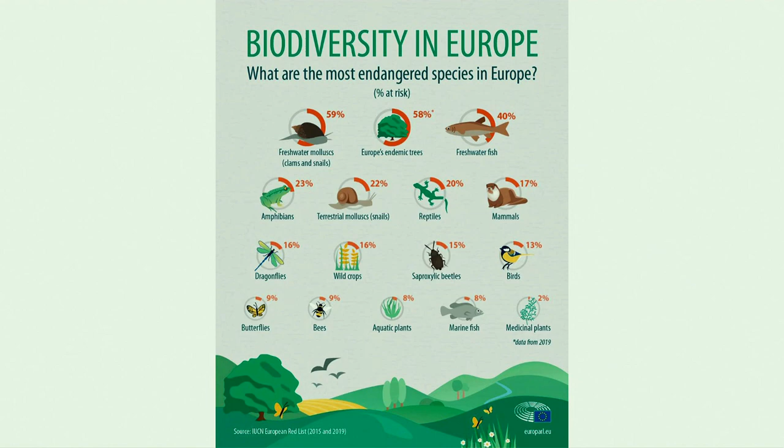Right, so barriers in fish. Freshwater fish are in trouble. That's the short version now after yesterday. I think we all agree on that. And of course, the freshwater mussels, Martin. Why is that? Well, obviously, climate change, overfishing, and also the presence of dams. And I think this slide, or some version of it, has been mandatory in most talks. So I think we can all agree on that.

Europe is heavily fragmented. But the thing is that obviously not all these barriers have anything to do with hydropower. So most of the other barriers are obsolete, and we can remove them if we have the funding and if we have a good plan for in what order to remove them. But the dams connected to hydropower is a different story. But why do they matter?

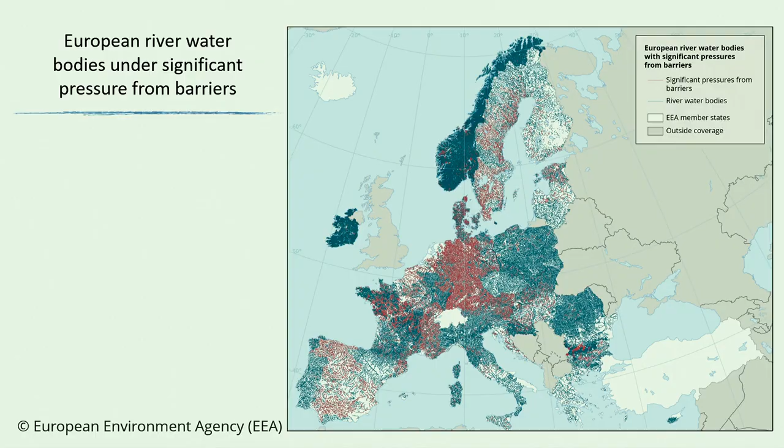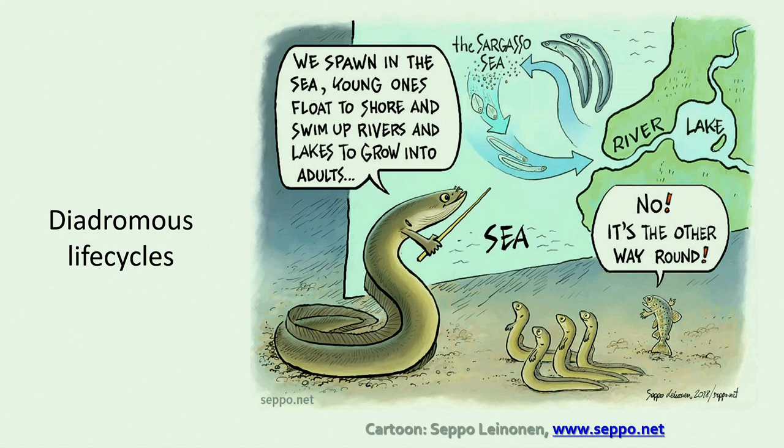Well, we saw the theater play yesterday that really dug into the details here. I'm also, like Jörg, I like the cartoons of Seppo, so here's one of them. So even though the eel and salmon can't really agree on the details, they are both right. I mean, they are both diadromous species, so they rely on intact connectivity between freshwater and saltwater. And I just had to include these wonderful pictures by Jennifer Clausen, showing the two life cycles.

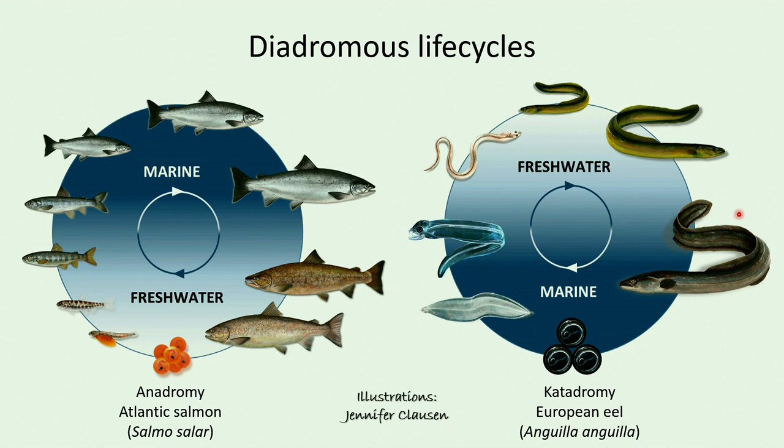So with salmon being anadromous, they spawn in freshwater, stay a couple of years in the river before they move downstream to the ocean for increased growth. And then they head back after a couple of years to the natal stream. We all know this. And then on the other hand, the other extreme, if you like, is the European eel. That is catadromous, so it does the opposite. It spawns at sea, drifts towards Europe. Some, not all, eels enter freshwater for increased growth, and they stay 5 to 30 or even more years in freshwater before they need to go back to sea and cross the Atlantic Ocean again. So it pretty much boils down to same but different for these two species.

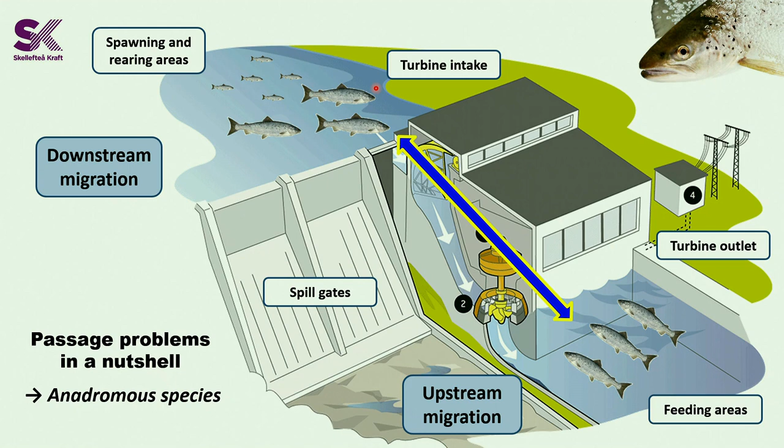So salmon moving upstream as spawners tend to aggregate below the first barrier at the turbine outlet. If they manage to get past somehow, after spawning, they return downstream as kelts, and a couple of years later, their offspring. And they, again, tend to aggregate at the turbines, but the turbine intake this time. So again, same but different for eels.

The major difference here is that they move upstream as juveniles, worm-sized little creatures with a phenomenal climbing capacity. They can climb vertical walls unless they hit the dry spot, and then they fall down and have to start all over again, unless they're already eaten by some predator on the way. And the adult eels, again, 5 to 30 years later, also aggregate at turbine intake, but since they are masters of passing pretty much anything, they tend to move into the turbines and typically get chopped up into 1, 2, 3, or 4 pieces. So again, this is the passage problem in a nutshell. We have to connect downstream with upstream for multiple species.

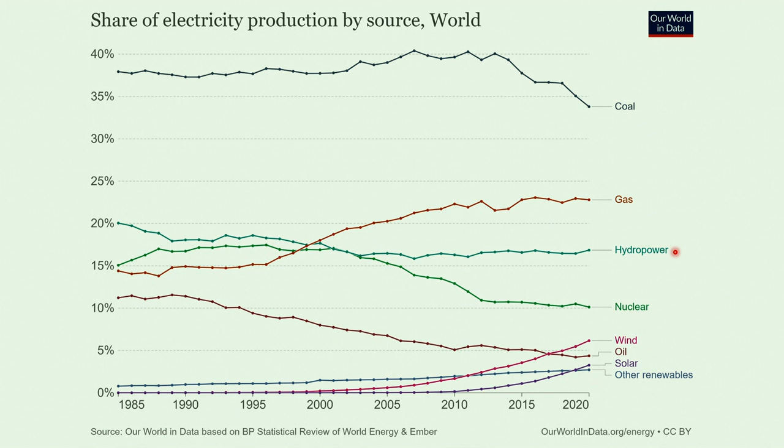Right, but then we do have some use of hydropower. So again, we can't just start removing all the hydropower dams when the electricity production on a global scale looks like this. We need more renewable power. We don't need less. So this is what we saw yesterday in the play with, on the one hand and the other hand, even though I won't be as dramatic when I go through this. But fact is that hydropower is considered to be the main reason behind the declines of more than half of the threatened fish species in Europe.

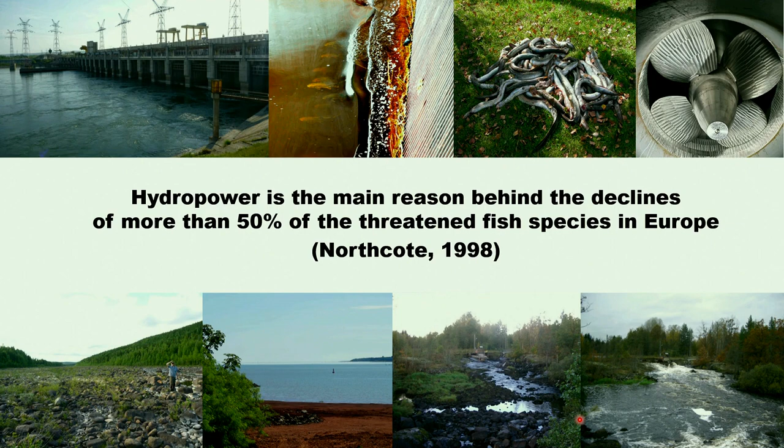And of course, it's not just about fragmentation. We also have turbine passage, fish moving through turbines, getting injured or even killed. We play around a lot with rivers, so we divert water from one river to another, leaving the one river dry, or the opposite when we build dams and create reservoirs, in this case 170 kilometers long at Itaipu, and hydropeaking, with aquatic organisms being faced with these conditions, ranging from more or less dry to flood conditions within a matter of hours, even minutes.

So I would say that we still need our fish passage solutions. And I thought I would just start by showing you the definition of what we call FPS. So it's any device, structure, or mechanism which is designed or operated to facilitate safe movement of fish, of course, in an upstream and/or downstream direction, past one or several impediments. And this is the definition taken from the European standard for assessing FPSs.

So we have kind of agreed on this, at least on a European level. And I think it was Rachel that used the same figure yesterday. So we can divide fishways for upstream passage into technical and nature-like fishways. The technical are typically made out of concrete and wood, and the nature-like are designed to mimic natural conditions. So we're building an artificial creek.

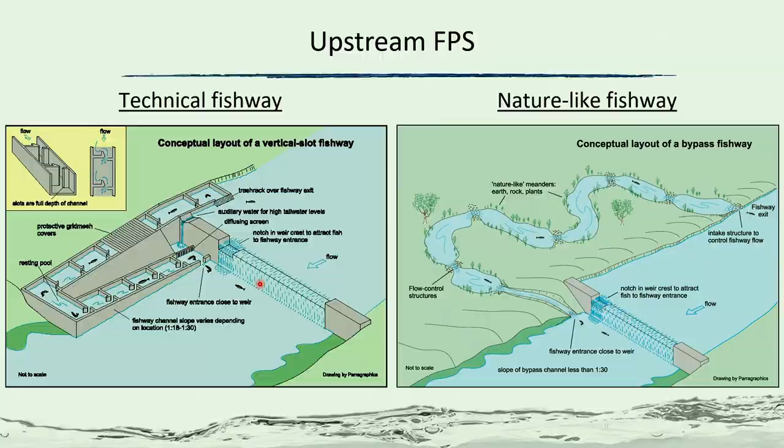And of course, the main idea, the goal with them, they have the same goal, and that's to help fish pass barriers that they cannot overcome. And two examples can be seen here. So obviously the nature-like fishways look prettier, and they require more space, but you can also include habitat in your design, so they can serve more purposes than just simply providing passage.

Downstream passage solutions started to be developed a couple of 100 years later, I guess. And I expect some of you to disagree with me, but I'm simplifying things here. So I would say that this is the main solution at the moment: screens and racks. And we have the two main types, the inclined screen. So that's your powerhouse with the turbines. So the inclined screens guide fish to the surface where you have entrances bypassing the powerhouse. And the angled screens use the same principles, but instead they guide fish sideways to an entrance and bypass the facility.

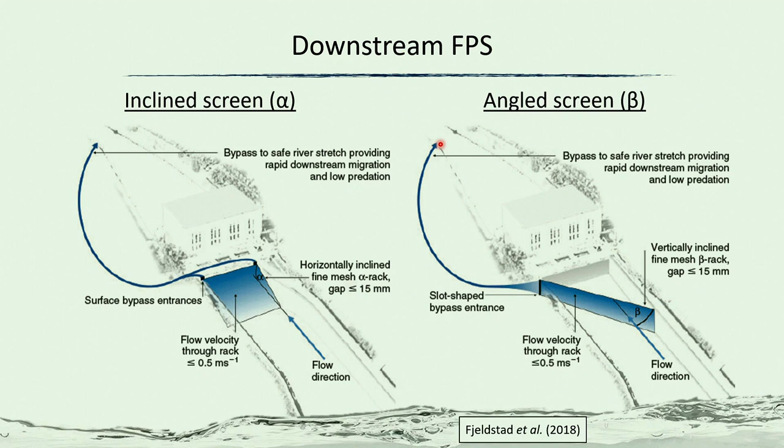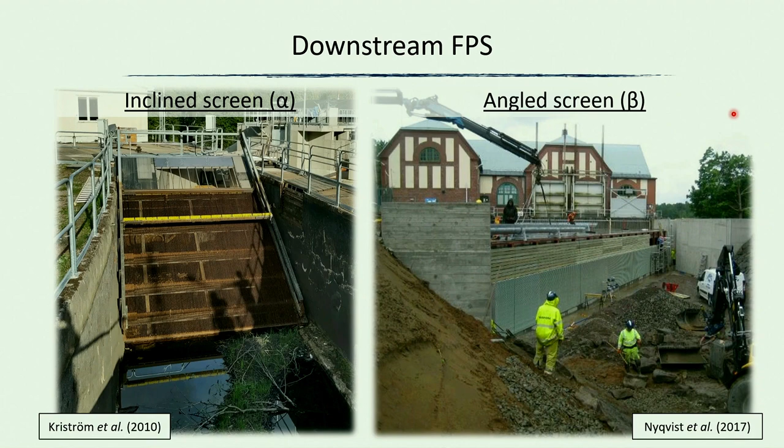And again, two examples. So the inclined rack, this is a relatively, or a very large entrance to bypass. You can see it covers almost the entire width. And the angled screen with entrance over here. And then, of course, we have bubbles and other interesting potential solutions, but I won't talk about them here. But I will mention this quick and dirty option for downstream passage.

It's quite tempting. I mean, all power plants have spill gates. They are there so that you could release water that you cannot store in your reservoir or discharge to the turbines. And again, of course, it's tempting to just open them a bit and say, look what we did for the fish. But in most cases, they don't work. But I will show you one example, one case study in a bit.

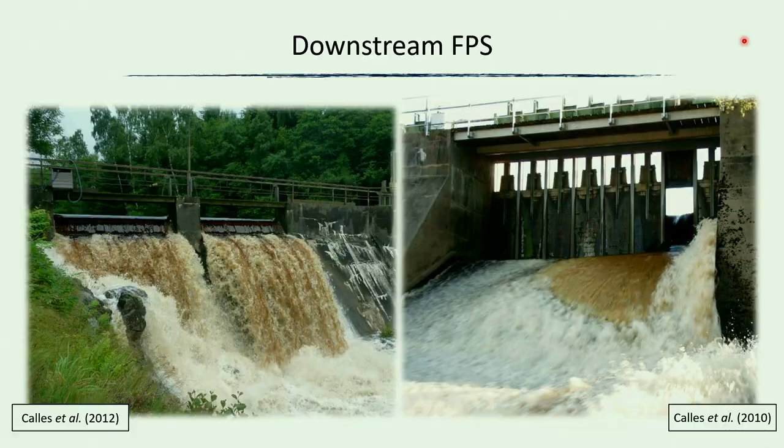So what are we looking for here? What signifies the ultimate fish passage solution? Well, obviously, they should provide two-way passage, because typically you cannot solve both upstream and downstream passage with one solution. Apart from that, they need to be efficient, injury-free, and timely, so limited passage time. Shouldn't take too long for the fish to pass, and they should pass all naturally occurring species and life stages.

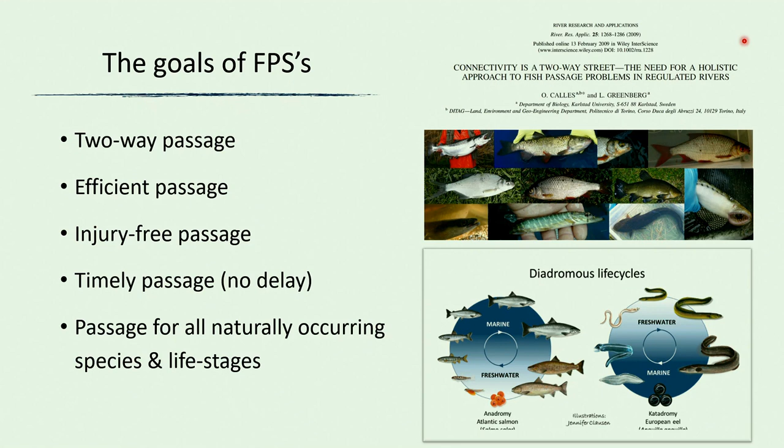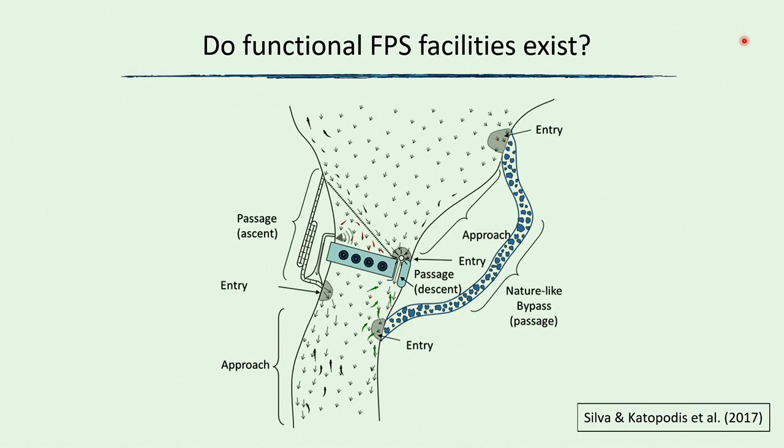I focus on salmon and eels, but that is because they suffered the most from fragmentation, and they're also more easy to study. But do such fully functional fish passage facilities exist? I would say, yeah. This is my favorite example that most of you, I guess, by now have seen before. So this works. It's very close to 100% both upstream and downstream. And I'll provide some details later on.

But like Jörg was saying, obviously from the fish's perspective, the ideal solution is just to get rid of all the dams, all the barriers. But again, we need hydropower, at least for now, so that's not really an option when it comes to hydropower dams.

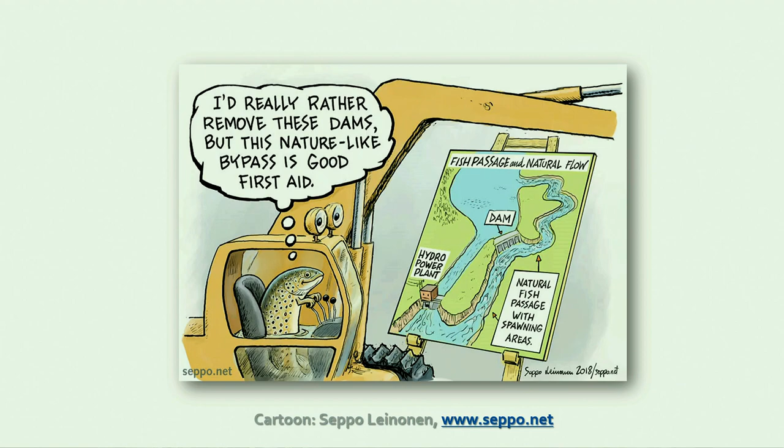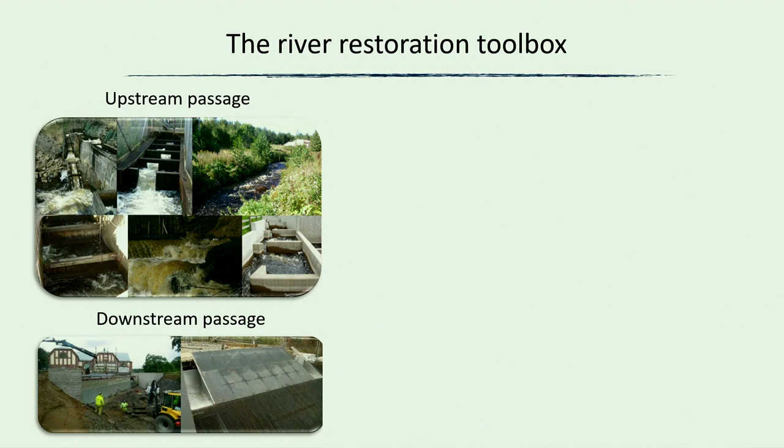So I talk about fish passage today, for obvious reasons, upstream and downstream, but just to remind you, of course, dam removal could replace all these solutions, but apart from providing passage, we have to make sure that there is sufficient high-quality habitat upstream of the barrier in question, and that we have enough flow released so that fish can migrate and that the habitat is good enough. And then we have the unconventional tools. I'll provide an example later.

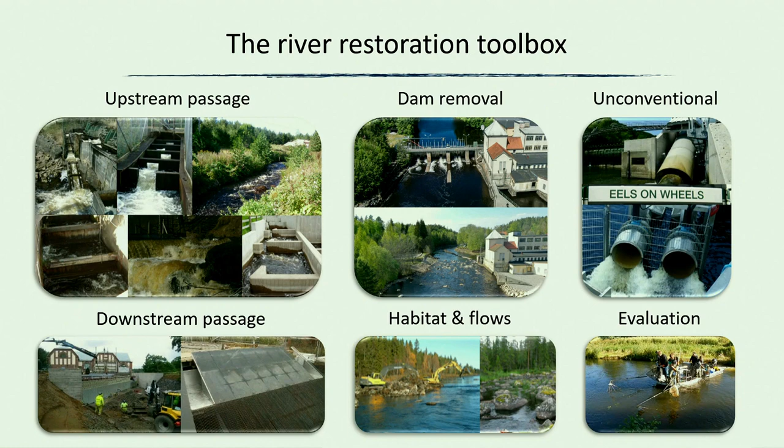And last but not least, we should never forget to include evaluation or monitoring in our projects, because if we don't know what we're doing, right? We can't really learn from our successes and failures. So evidence-based tools is what we need.

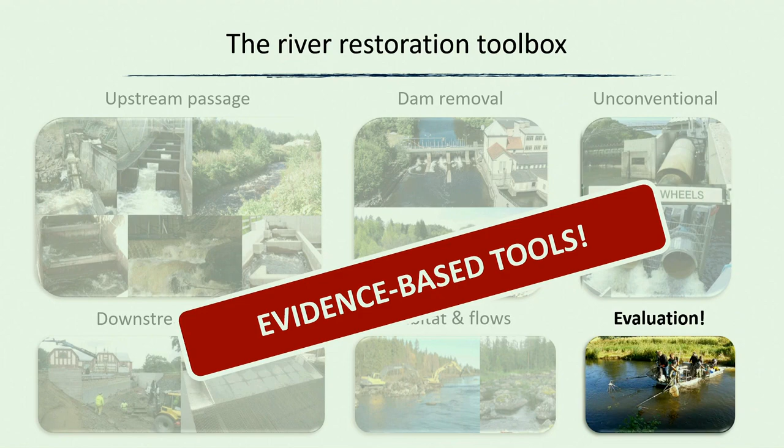Sounds obvious, but it's not. We're not evaluating all our remedial measures in RIBES. Right, so over to monitoring and evaluation tools.

Monitoring is much more than tracking fish, obviously. So it's a tool to assess environmental conditions and trends over time so that we can spot if something is about to go wrong, or perhaps it already did, but at least we know what the problem is and can try to solve it. The program areas within the EU range from mountains, air, toxic substances to freshwater.

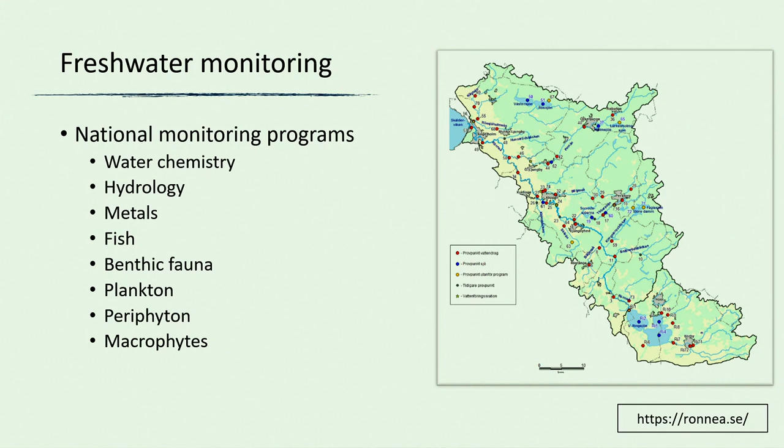And the freshwater monitoring programs are very extensive, and there are national monitoring programs covering lots of different parameters in our rivers. So this is just one example from a Swedish system with a network of study sites or monitoring sites. So for fish, in Sweden we have, I'm not sure what it's like in other European countries, but in Sweden anyone can access fish monitoring data online, which is pretty neat.

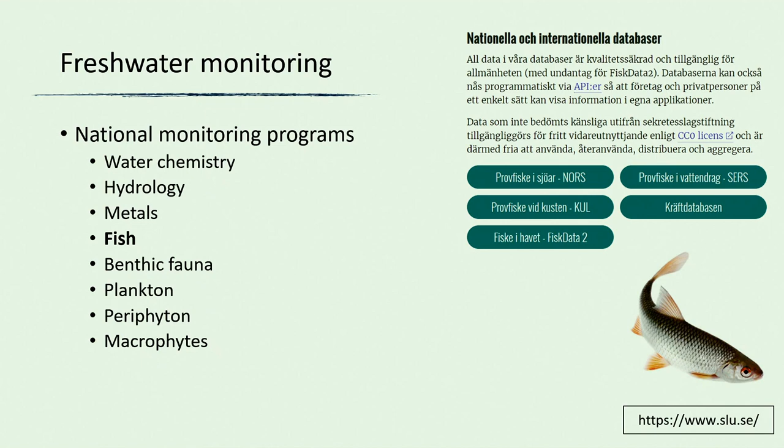And I'll provide an example of how we use this in research in a couple of minutes. So net fishing and electrofishing can be accessed by anyone online. So that's the way it should be, I think.

But then we also have the EU data collection framework, the DCF, that monitors index rivers with wild populations of typically salmon and eel. And when I was preparing this presentation, I realized that Sweden is quite an exception when it comes to the DCF index rivers, because most countries had a bit of a slow start, didn't really find the best candidate. And so this network of index rivers is not complete yet, but hopefully it will be soon so that we can gather more information and learn more about what's going on.

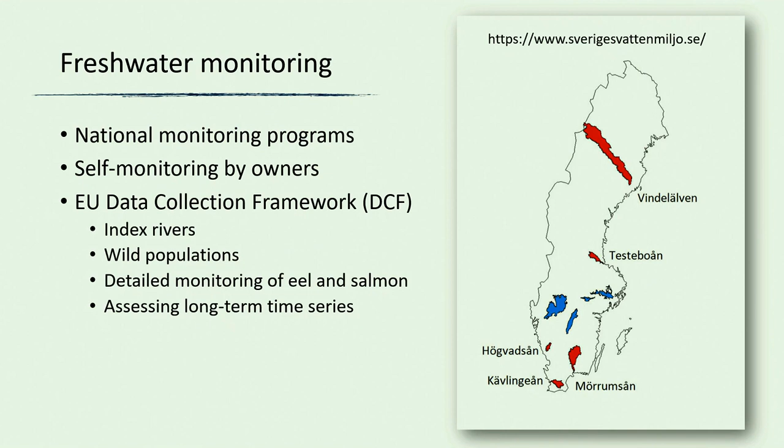So what do applied research projects such as RIBES have to contribute with? Well, we can evaluate efficiency for specific measures and for particular species or even life stages. We can test new designs and innovative solutions, new methods. In some cases, we should stick to standardized methods, but we don't have to, right? We can think a bit outside of the box. And of course, we should have a more scientific and experimental approach.

So I like toolboxes. And here's another one. So this is the very much simplified evaluation toolbox. So there's a range of different methods that we can use that are also used in monitoring, but I decided to divide them into capture methods, simply different ways of catching fish. If we don't want to touch the fish, fiddle with them, we can go for counters and just observe fish from a distance. And if we want to take the next step, we can tag fish so that we can ID them on an individual basis. So we can go for mechanical or electronic tags. And of course, we should also pay attention to the abiotic factors.

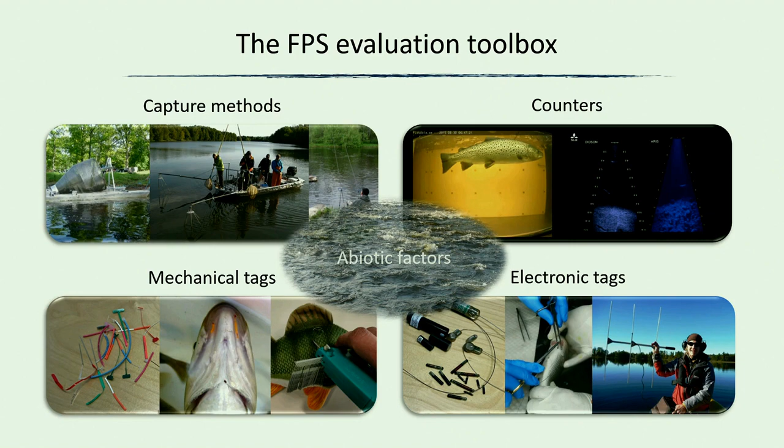Right, so I have a couple of examples. First, just very quickly, capture methods. We can talk about them for hours, obviously, but I will just mention that they are divided into passive and active. So with a passive capture method, you typically put out your capture gear, you sit and wait for the fish to enter. And with active capture methods, it's up to you to bring your fishing gear and go out there and find and catch the fish. And there's a huge range in the impact they have on the fish. So from limited or low impact to high impact, even lethal, if you use nets, for example, gill nets, that is.

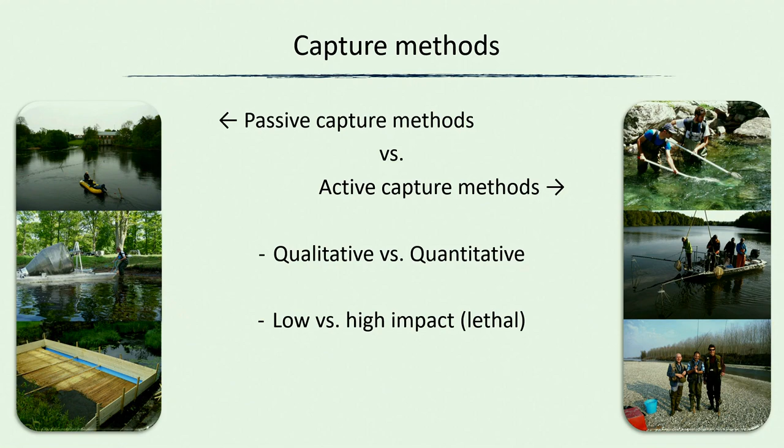So my example is electrofishing that can be carried out by foot, like Daniele and Michele here up in Valle d'Aosta, or you can use the electrofishing boat to be able to fish deep waters, lakes, and so on. And they use the same technique, so you electrocute fish. So first you attract them, and if they get close enough, you stun them and you can collect them.

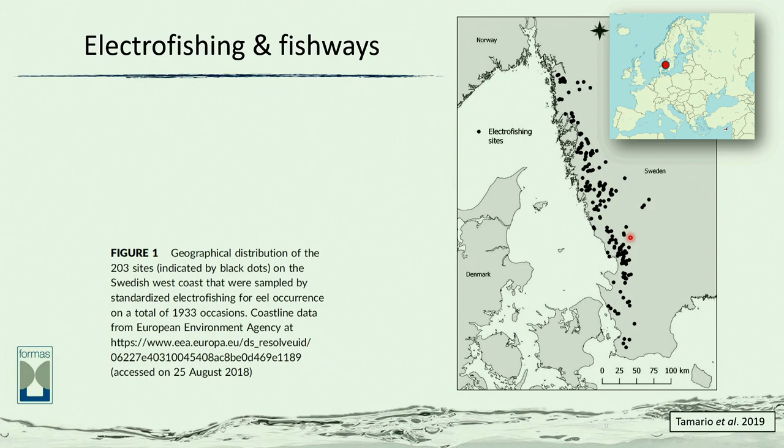We had this project on eel passage where we wanted to figure out what was different in regards to fish passage solutions between different sites on the Swedish west coast, where there were eels versus where there weren't any eels. So then we used data from the electrofishing database that I was talking about, and we compared the different sites. And what we found here was that the only fish passage solution that didn't have a negative impact on eel occurrence upstream of the dam was nature-like fishways. Eel ramps and technical fishways, well, they were no better than dams without any fish passage solution.

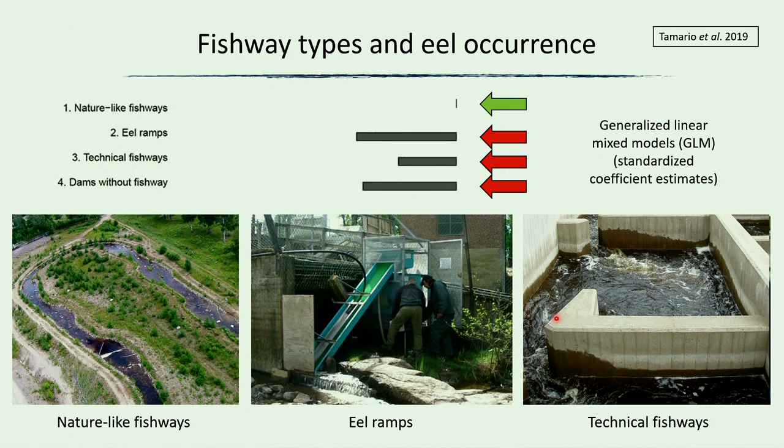So from my perspective, after conducting years and years of manual fieldwork, this was pretty neat. Download data and get these results, which was pretty cool. So again, with capture methods, you do fiddle with the fish. You don't always know how you impact their behavior and passage performance. So that's where counters could be an option. Video cameras or acoustic cameras.

So video cameras have a low range, but you get really pretty pictures. You get high resolution images or videos of your fish and other creatures that pass through a fish pass or a fish counter. And then you have the acoustic cameras that use sonar technology and typically have a higher range, so you can cover at least the entire width of a relatively large river, but instead you get low resolution images. It makes it hard to tell the difference between species and sometimes even between a fish and a piece of wood. So all methods obviously have their pros and cons.

So let's see if the music is turned off.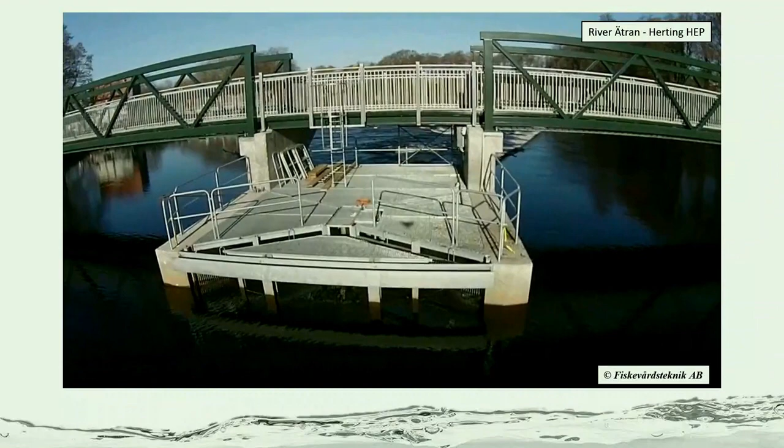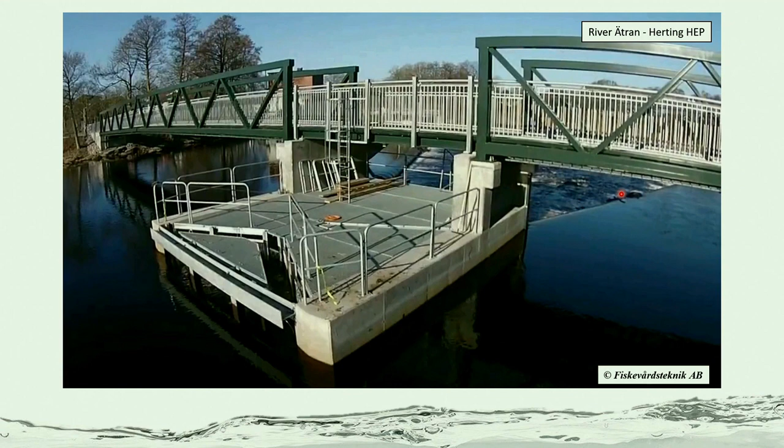It is, cool. So this is the huge nature-like fishway that I showed you from above earlier. And here is a video counter. And this is the first salmon that passed through this new fishway some years ago. So in this case, this was the optimal tool, I would say, to show us what happened after the fishway was improved.

Because we knew that there was a negative trend in regards of the number of salmon and trout spawners migrating upstream in this river passing this site. And after the fish passage solution was modified, we saw an increase, which was obviously good news.

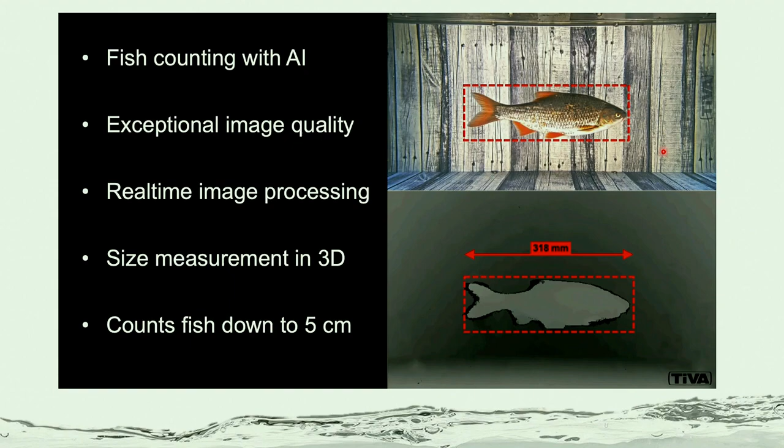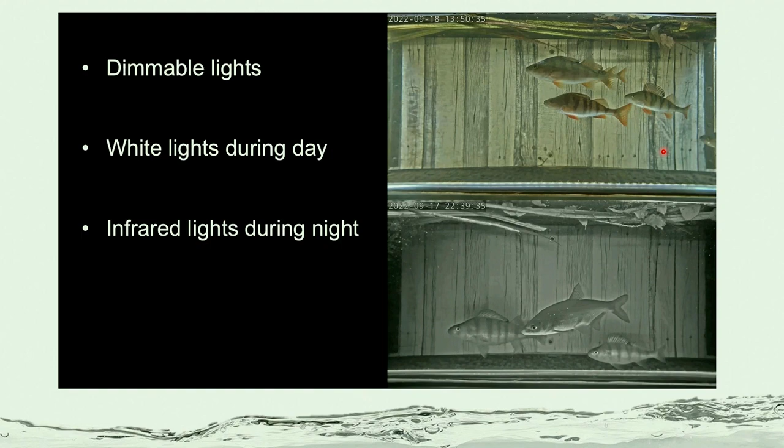And the video counters, they are really improving quickly now. So this is just one example of the TiVA counter that most of you guys learned a lot about, I guess, in Karlstad when you were there. But to me, it's pretty mind-blowing. I mean, you get the fish recognition algorithm, so it counts and IDs the fish for you. Works well even in turbid water. And you can even get information about if your fish lack an adipose fin or not, so if they're wild or of farmed origin. And it's easily accessed online as well.

So that was a bit of a commercial break, I guess.

But right, so there are all these tools, and it is pretty fantastic. So we went from the old fishway to the new fishway, but also from the old counter to the new counter. And with the new counter, all of a sudden, we realized that we had invasive species in the river that no one really saw before. And I think you can guess from the colors here what species I'm talking about.

Come on. It's not that early. Thank you, sir. What else?

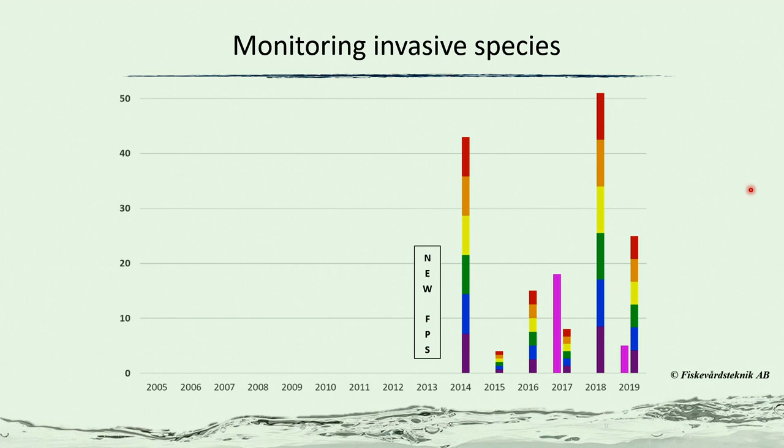The pink salmon. Right, so we have them in our rivers now. So we're probably making it slightly easier for them to proceed upstream with a new fishway, but what do you do? Right, so again, we get pretty pictures. We can use counters for a lot of projects, but we can't tell the difference yet between individuals. For that, we need tags.

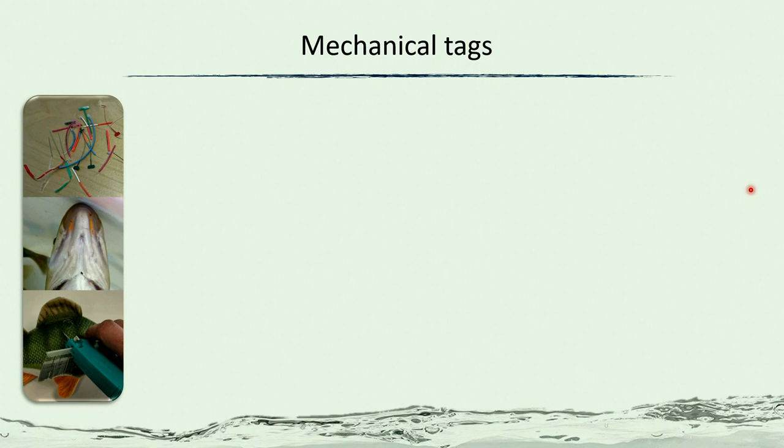So mechanical tags, well, it could be pretty much any piece of plastic with a number on it that you attach to your fish. So when you recapture them, you can say, right, this is roach number 7. That was 500 grams when we tagged it. And I was struggling a bit to find a good example here, but this is what I ended up with. This is a very cool project.

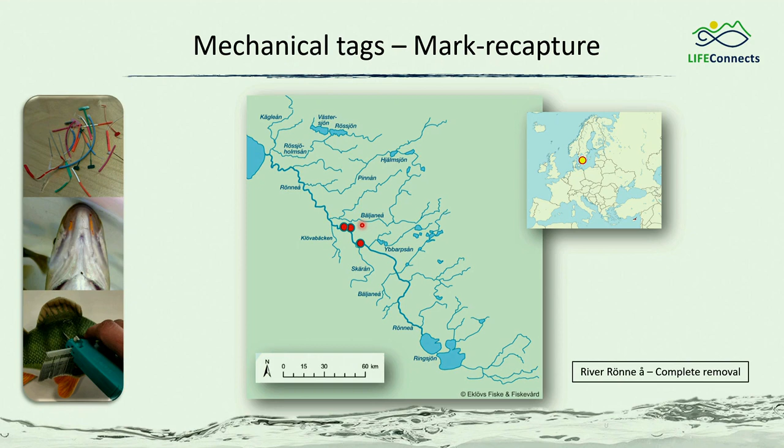This is River Rönne å, again down south in Sweden. So this is the catchment area of the river. There are only 3 hydropower plants on the main stem. They don't produce that much electricity. Could just replace them with a large windmill. And they're all being removed, hopefully next year. So we'll open up the entire system from sea to source. And our task here is to study how this affects the salmon population. And one thing we wanted to look at is the smolt production before and after dam removal.

So we have used this screw trap with a guide arm to catch smolts. And all the smolts that we catch, we tag with a so-called streamer tag. So the piece of plastic with a number on it. We bring the fish back upstream, we release them to study the recapture rate. And based on that, we can make a rough estimate of the total smolt production.

So we had a recapture rate of 6 and 4% for salmon and trout, and it resulted in an estimated production of between 1,000 and 2,000 smolts, which is way lower than the previous estimates of more than 10,000 smolts of each species. So we did this year. We haven't really figured out yet what's causing the mismatch. But we have the information now so that we can move on.

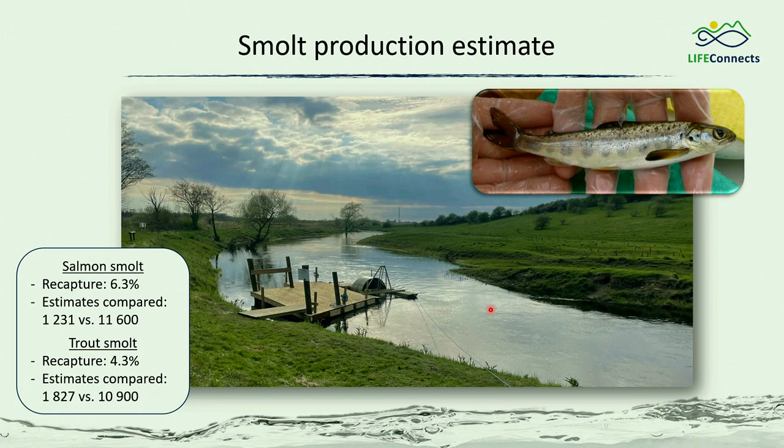So when we have our mechanically tagged fish passing the trap, if they don't end up in the trap, we don't have a clue what's going on, obviously. We don't know if they died or were eaten, whatever. So in order for you to track fish, you need to use electronic tags. And we heard a lot about different studies using electronic tags yesterday. So I thought I would mostly just comment on the differences between the methods that didn't really come through yesterday. So again, a range of different techniques. We have the satellite tags, radio, acoustic, and the PIT tags.

Right, so just quickly, the main differences between radio and acoustic. If you use radio tags, you can track the fish in pretty much any way you like. You can track it from a plane or a boat, stationary receivers, but you have to stay away from deep waters and salt water, right? Whereas with acoustic telemetry, you're more limited when it comes to tracking fish. You typically rely on stationary receivers, but you can track your fish in deep and saline waters.

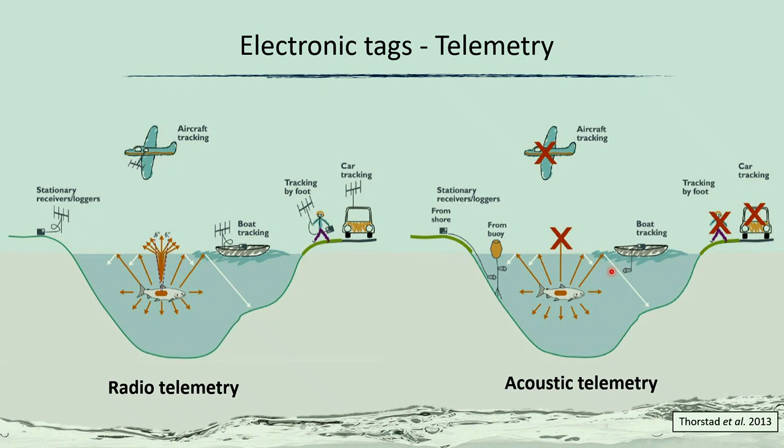And then, Johan, slugs, PIT telemetry. This is Johan in my backyard. He brought this invasive species. He PIT tagged them and released them in my backyard. I still don't know why. But then he went out and tracked them with a portable antenna, like the one that Alfredo was also using. So it's cheap, it's very simple, but it has very limited range. Works fine for slugs though.

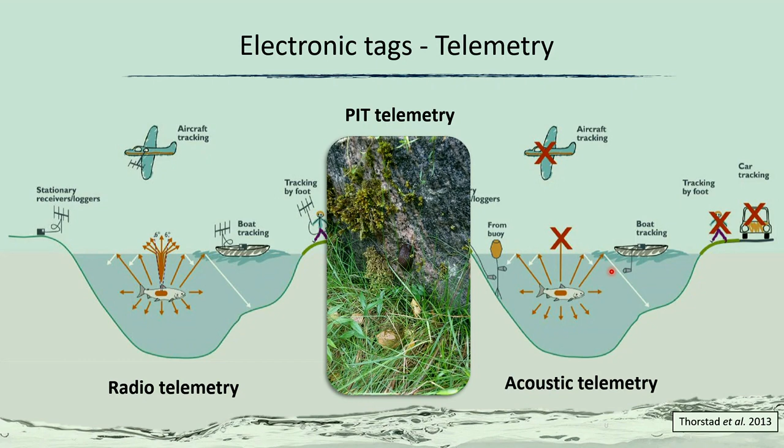Right, so the first example is from the River Po, where Florian and Alfredo and some others have been working on this fishway at the Casale hydroelectric plant. So it's a standard layout, if you like. You have the powerhouse, you have the fishway, and you have spillways. And here's the fishway up close.

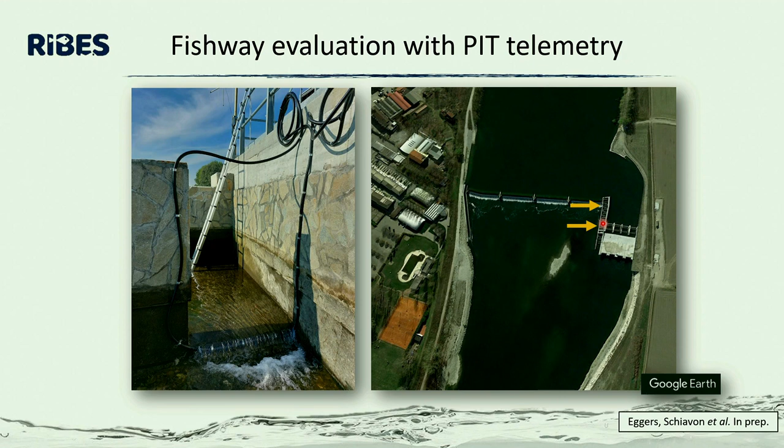Right, so to study fish passage here, humongous PIT antennas were installed in 2 locations, the uppermost part and the lowermost part of the fishway. And then, of course, fish were PIT tagged, and they were released at the lowermost part of the fishway and outside of the fishway to see to what extent they were using the fishway.

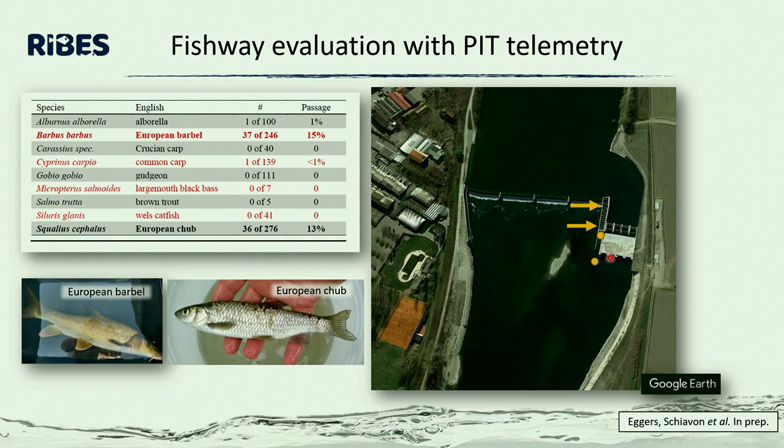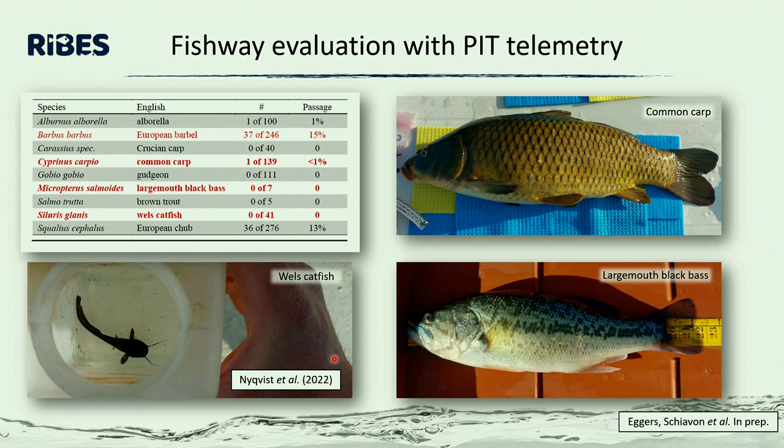Here are some other invasive species that didn't really perform that well, luckily, I would say. For example, the catfish. But then other studies and other parts of this data set show that, yeah, the big catfish can pass through the fishway, so it's not preventing any movements for them. Right, so we do know exactly what individuals pass through the fishway and when, but similar to the mechanical tags, we don't have a clue what's going on with the remaining fish, the 85 to 90% that never turned up in the fishway.

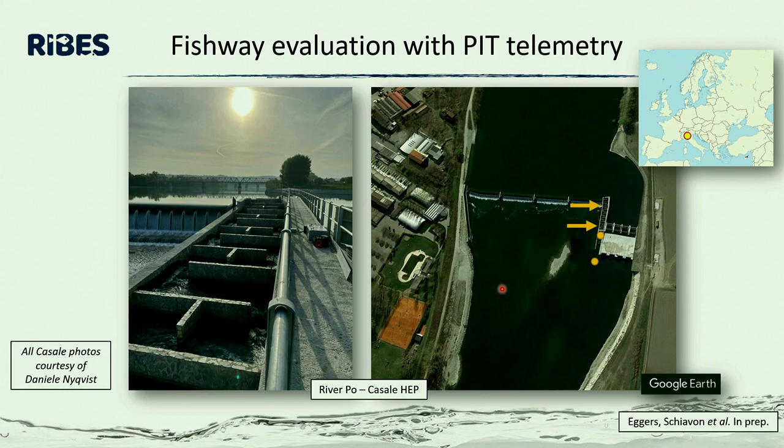And obviously the next and the last technique is the use of acoustic telemetry. So a bit of overlap here also, James. This is the case that you presented yesterday. So the river Mörrumsån has a huge lake system in the uppermost part of the catchment. Then we have the main stem of the river with 5 hydropower plants in operation. There used to be a 6th one down here, but it was removed 3 years ago. And again, our task is to look at how this affects the salmon population.

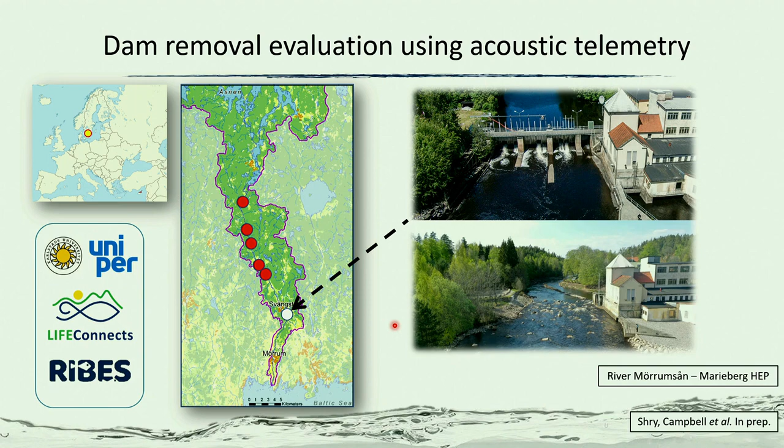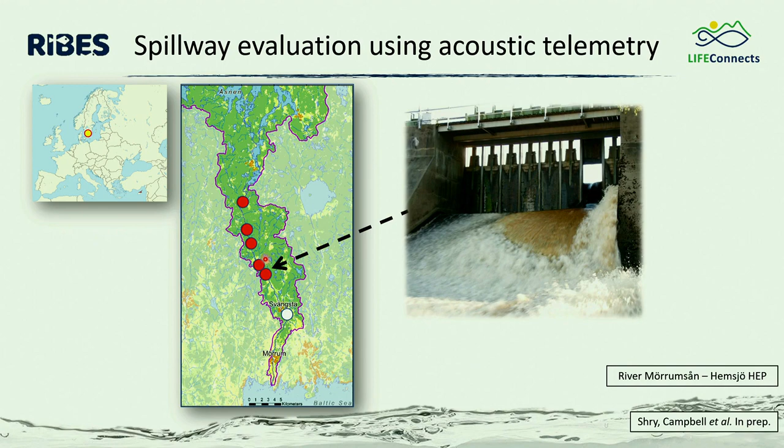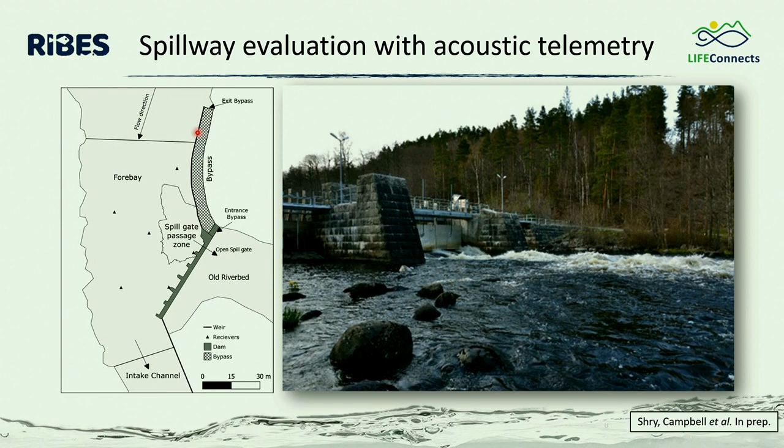But the focus here is on these 2 plants. They have nature-like fishways for upstream passage, but the only downstream passage solution they have is the quick and dirty solution that I talked about earlier, let's open some spill gates. So this is what it looks like from above. So the direction of flow, the intake channel, spillways, and the nature-like fishway for upstream passage. Right, so looking downstream, intake channel, spillways, nature-like fishway.

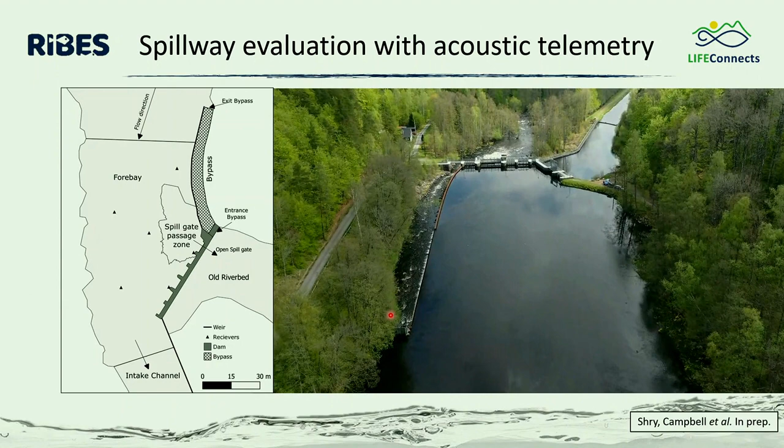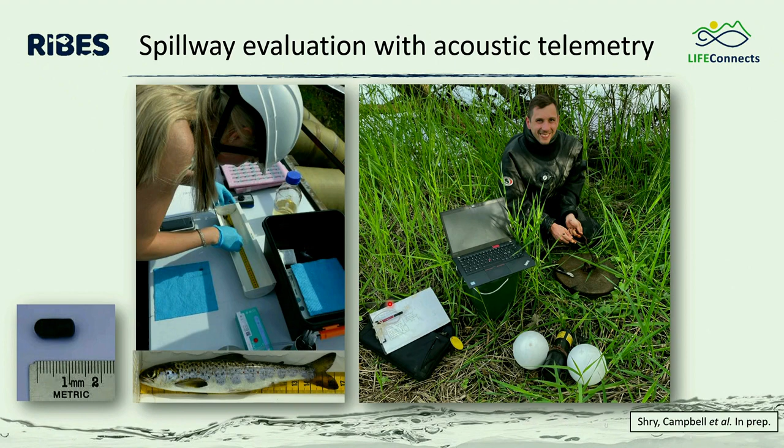And this is where Sam, one of our PhD students, caught and tagged 120 salmon smolts and released them in various places upstream of the dams. So this is what James spent a year on. Luckily, before you came into the project, James, we had, as you know, fish on land in various locations, which was a bit worrying.

Anyway, so this is just one example of how one individual moved. It approached the spill gate and then decided, and went over here. And the idea now is to combine it with the hydraulic models that we have to try to understand why fish do what they do, why they end up in the spill gate or not, basically, like many others in RIBES.

Right. 68% of the smolts actually found the spill gate, which was higher than expected. But then the release here is 50%. So 50% of the water goes into the power plant and 50 is spilled on the side.

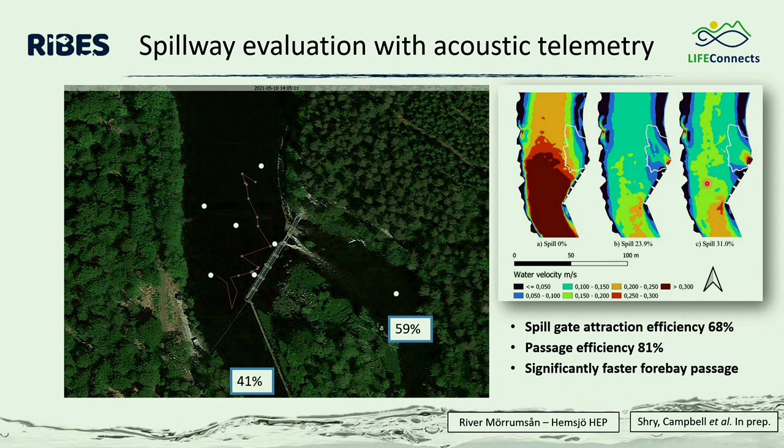So that's another thing we have to worry about then. It's not just a matter of the mechanical solutions. We also have to worry about other factors. So why is telemetry the ideal tool for evaluating fish passage solutions? Well, it's because we need the details to understand what's going on, why solutions are working and not working.

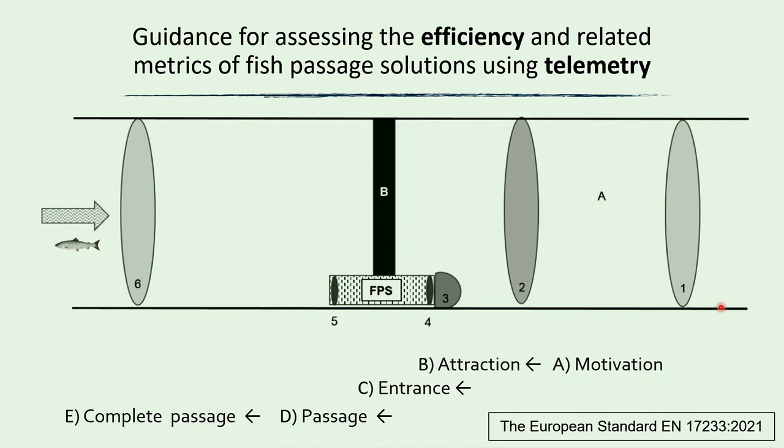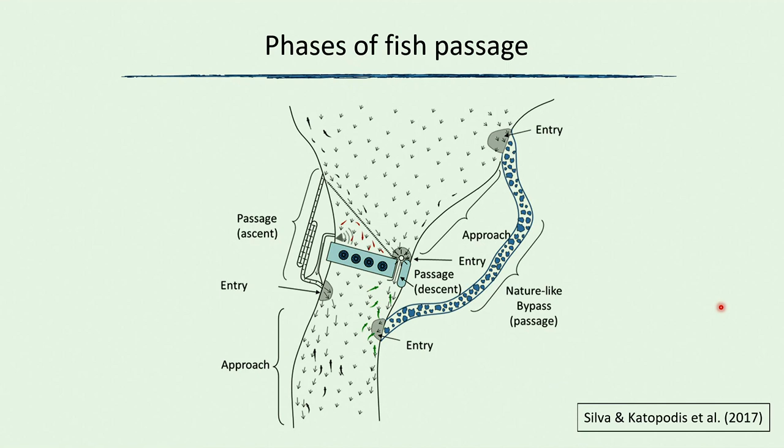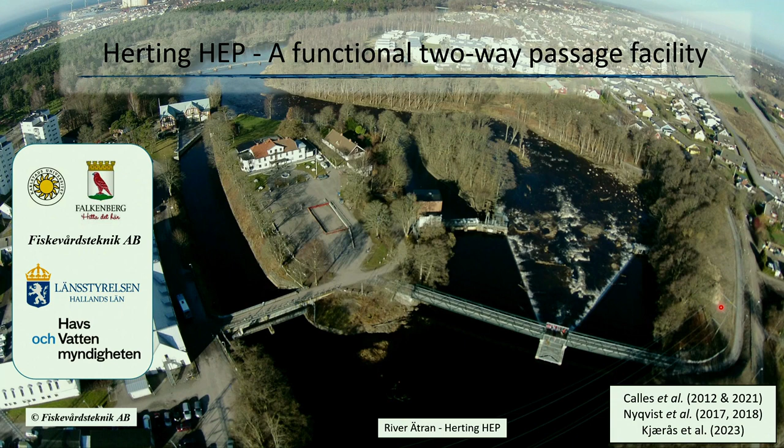And again, the figure by Silva and Katopodis showing the flow patterns and all these different phases of fish passage. But of course, most projects use a combination of tools. And that brings me to the last short bit with the two multi-tool case studies. So again, the Herting HEP that I claim is a functional two-way passage facility. And here we used pretty much all tools when we evaluated it over 10 years.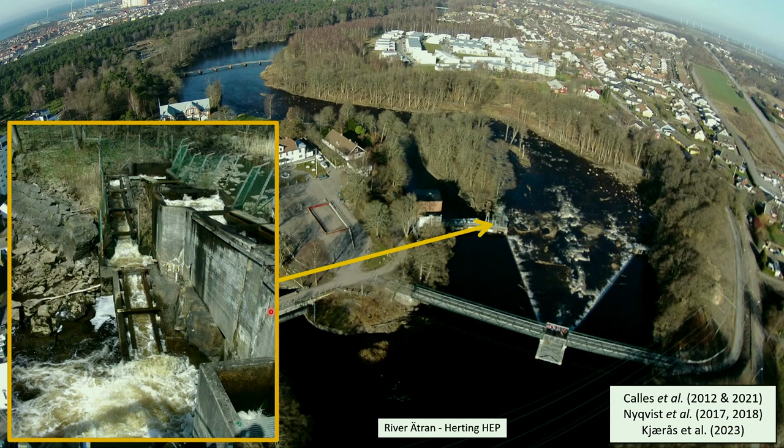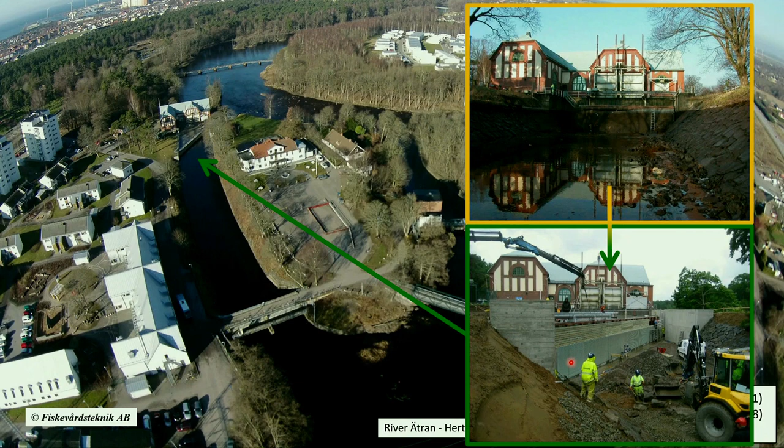So the old solution was a technical fishway, a Denil fishway, very steep, fast-flowing. It was replaced by the enormous nature-like fishway with the fish counter up here. And for downstream passage, we went from a conventional trash rack with a trash gate over here to an angled rack with a bypass. And we used pretty much any method that you can imagine to catch fish and track them and so on.

And this is the summary of the results. We have improvements in passage efficiency for salmon spawners, sea lamprey, juvenile eels, even though we couldn't give you a specific number here. We can just say that the catches upstream increased after the modifications. And for downstream, perhaps even more spectacular, we have pretty much 100% for salmon kelts, salmon smolts, and European silver eel.

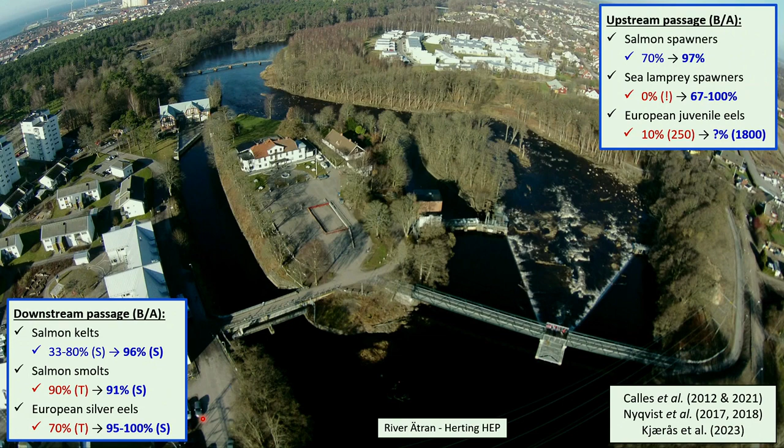And the next step here is to develop a tool for fishway designers, since we will use our high-resolution eel data and try to use machine learning to create this tool. And this is also a 3-year postdoc opportunity for anyone interested in machine learning and AI.

Right, so I couldn't help myself, but I have a minute or two, I think. Yeah. We had the opening ceremony for this screw turbine last week, so I just had to include it. It's one of those unconventional solutions with quite an interesting potential. So obviously it's an Archimedes screw. It produces electricity, but it also has a second screw inside the big Archimedes screw. So at least in theory, it can pass fish upstream and downstream while producing electricity.

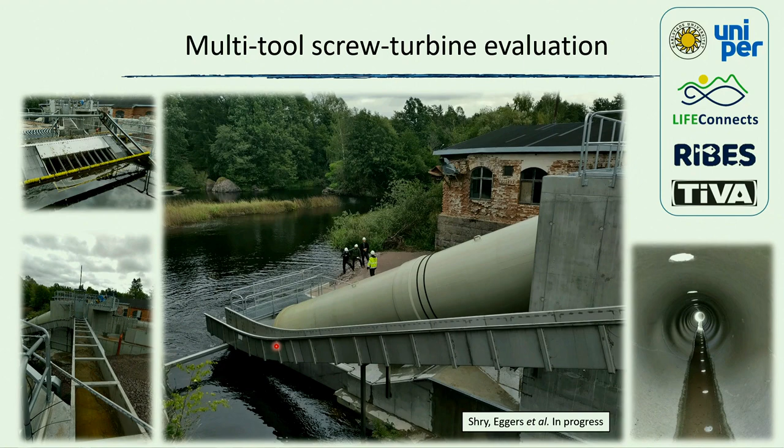Right, so we have fish counters in place, and we saw these guys pass through the nature-like fishway, not the screw, within the first week. I don't know if you had time to spot the catfish down here. So the Italians would go, ugh, and we go, yay, because it's native and it's threatened for us. So we like catfish.

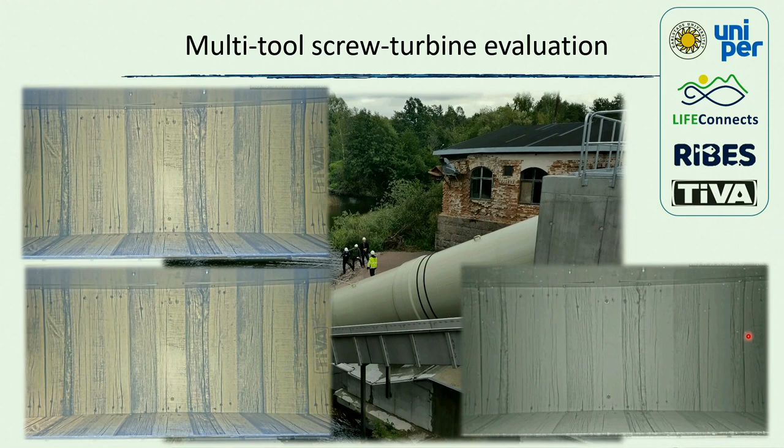Right, so it will be more than video counters. We will use hydraulic modeling in collaboration with Politecnico, and we will use the high-resolution acoustic telemetry to map the movement trajectories of each fish and again, try to understand why they end up where they do and why they find or don't find the entrance to the screw turbine.